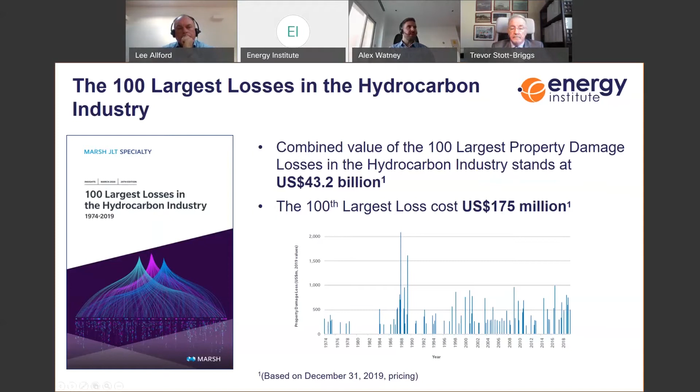So I'm sure many people will be familiar with some of the top 10 loss events. So Piper Alpha is the largest in our list, at just over $2 billion US. So this is an adjusted property damage loss for December 2019, so effectively an inflated cost. Piper Alpha, as most people probably know, was a fire and explosion event in the UK North Sea.

You've got Phillips Pasadena in Texas in 1989. That's around $1.6 billion. There's Ekofisk in the North Sea. That was 2009. That was a vessel collision with an offshore platform that caused almost $1 billion of damage. There's Baker, Gulf of Mexico, 1989, fire and explosion event. Campos Basin in Brazil, 811 million, again, fire and explosion. Esso Longford in Australia, another famous process safety case, 1998. So that's just a few of the high-level ones that people might be aware of.

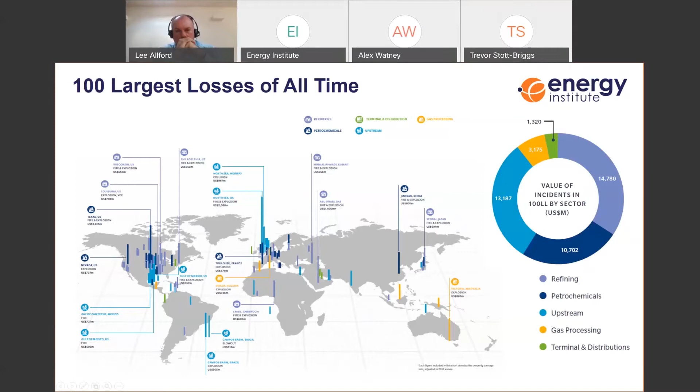And if we look at some of the more recent losses, in 2018 and 2019, you might be familiar with some of these. So just to highlight a few of the more highly cited ones. There's the PES refinery explosion in Philadelphia, which happened in June 2019. That had a recorded loss value of about $750 million. The incident was caused by the failure of a thinned elbow in an alkylation unit.

It should be noted that this site changed ownership around a dozen times over the years before the loss, and this can be seen as a red flag because each transition can introduce the potential for personnel, information records, and systems of work disruption. And this links in with asset age. It tends to be that older sites will generally have more differing owners than younger sites.

There was also the Husky refinery explosion in 2018, also in the US, in Wisconsin. It's believed that the root cause of this was an FCCU spent catalyst slide valve, which was intended to be provided with erosion protection suitable for the design life at the design conditions. But this valve had actually eroded and was unable to maintain the catalyst level required to prevent air from mixing with hydrocarbons during transient operations, and the recorded loss was $650 million.

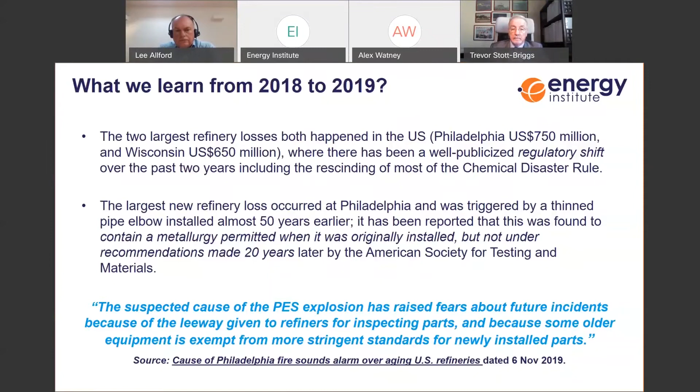If we look at what could potentially be causing these, at the end of 2017 and into 2018, US refinery utilization stood at its highest level since 2005. This high utilization continued over the past 2 years and could contribute to the number of recent high losses. Downstream margins are usually positively affected by drops in oil price, which can result in refineries being pushed to operate at greater capacities, potentially leading to process safety being impacted and increased events.

You've also got the potential impact going forward of COVID-19 and the global pandemic. While this might reduce utilization, it could also lead to cost reduction exercises, reductions in maintenance, inspection and asset integrity spends, which, when we look back at data, can cause lagging process safety and loss incidents.

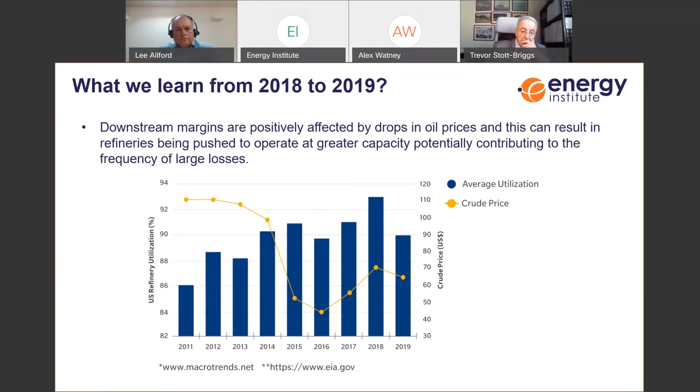Some of the data that Marsh collects relates to engineering standards. Marsh has a risk ranking system that we use to rank clients' sites in areas of installed hardware and management systems used, for example, systems of work, permit to work, management of change, emergency response. This has over 400 features that we rank within various topics and categories.

We've also seen that for both gas processing plants and terminals and distribution sites, the risk ranking data shows a potential deterioration across all areas, hardware, management systems and emergency response, over the past 12 years as well.

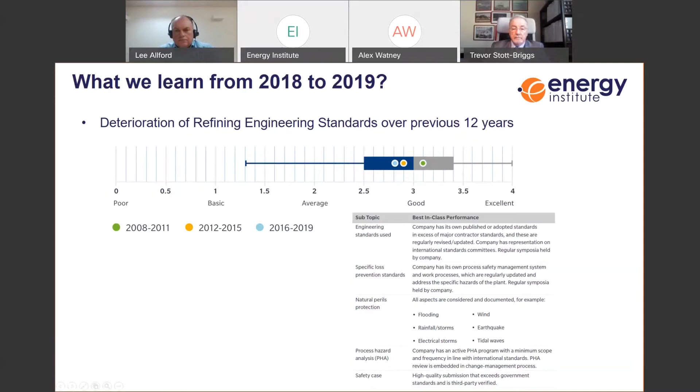I'll move now on to whether we're seeing history repeating itself. The past 2 years have contributed more incidents to the top 20 largest losses than any other 2-year window for 30 years. Not since 1988-89, when there were 6 of the largest losses, has there been such a concentration. Back in 88-89 you had Piper Alpha, Pasadena, Gulf of Mexico, the Campos Basin, Nevada, Louisiana, a large number of large value losses.

In the last 2 years we've also had a large number of losses: Jiangsu in China, the 2 refinery losses I mentioned, and Limbe in Cameroon. So you can ask, is there potentially history repeating itself?

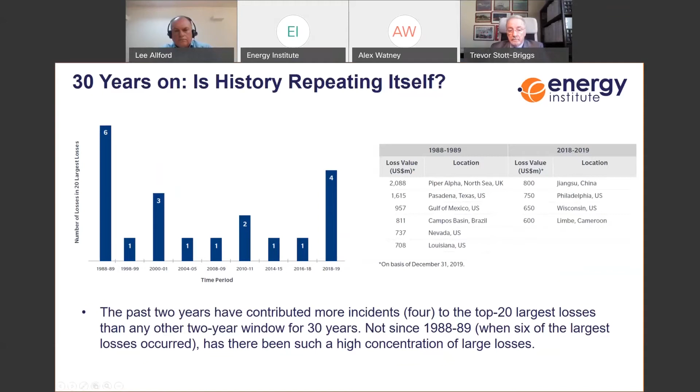Let's look at some of the contributing causes and escalating factors for both time periods, starting with 1988 to 89. For Piper Alpha there were many failings, and the Lord Cullen report made a number of recommendations that drove a lot of process safety improvements in the late 80s and 90s. Some of the failures were work permitting, management of change, especially with the change of design of the platform, shift handover, and emergency response planning and fire protection.

We also see for the Louisiana refinery that corrosion was one of the key causes of the loss. There are a lot of similar contributing causes and escalating factors. Systems of work regularly come up, and there are also escalating factors regarding emergency response.

So we generally see, good systems of work will hopefully prevent a loss of containment event, and then good emergency response and emergency control will hopefully then prevent the escalation of any loss of containment event, or if it does then start to result in a fire or explosion, it helps to reduce the amount of damage caused.

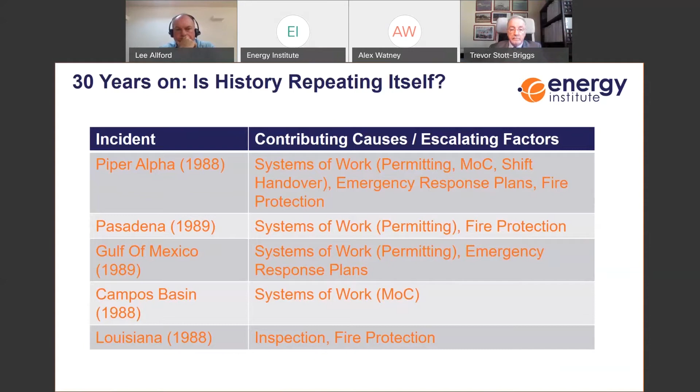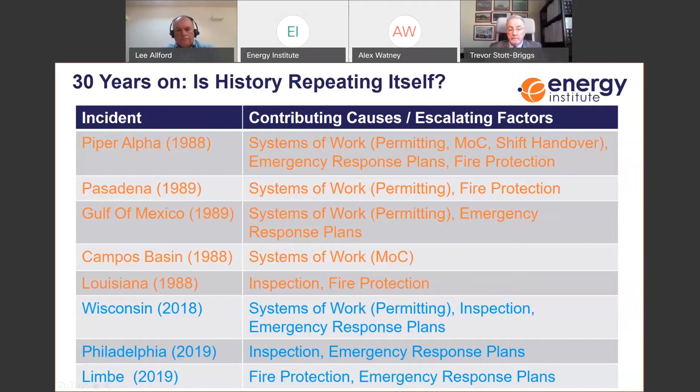And some people may be aware of a man called Trevor Kletz. He was quite a famous author on chemical engineering safety. And he's been quoted saying, "You don't have new accidents, you just have old accidents happening to new people." So how do we prevent history repeating itself?

It's a continuous process. We need to continue to educate ourselves to focus on process safety and risk management, and to learn from these lessons across all levels of our organization, from top management all the way down to frontline site personnel, and process safety culture is very important, that it's across the whole organization and it's not just in pockets. And I'm sure Lee will talk a little bit on that later on as well, when he talks about the Energy Institute Process Safety Management Framework.

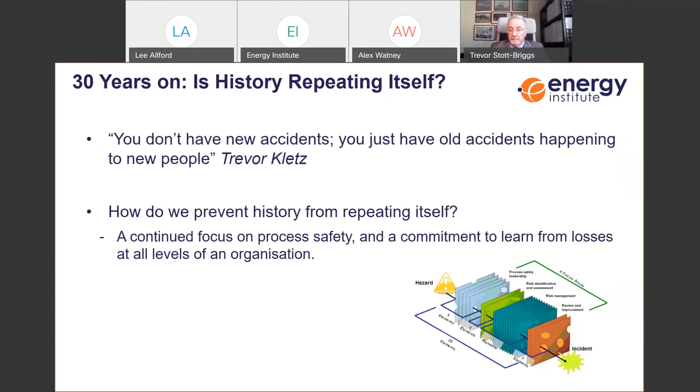If we look at some of the barriers to learning from losses, one of them is distance. So regulation often follows a major incident, and it's often enforced locally rather than globally, which can be understandable. It's quite hard to enforce regulation globally, and consequently, this only affects local awareness. And sometimes, in areas where there's maybe not a lot of regulation, and where they haven't necessarily had a lot of loss events, then they won't be learning from other past loss events. And at the same time, parties can be affected by closeness bias as well. So people will feel unconsciously less affected by events a long way away.

Next one is culture. So this can prevent lessons learned from being implemented effectively. There can be a fear of litigation or blame that prevents open reporting of incidents within organizations. And there can be difficulty challenging upwards in certain cultures and businesses, and that can prevent improvements being implemented.

Tunnel vision. So some companies don't realize the wider relevance of lessons. Siloed thinking can cause companies to imagine that an incident happening in a different type of facility from their own does not provide applicable learnings, but that's not always the case, and it's always good to try and learn from others, even if you maybe don't think that it's strictly relevant.

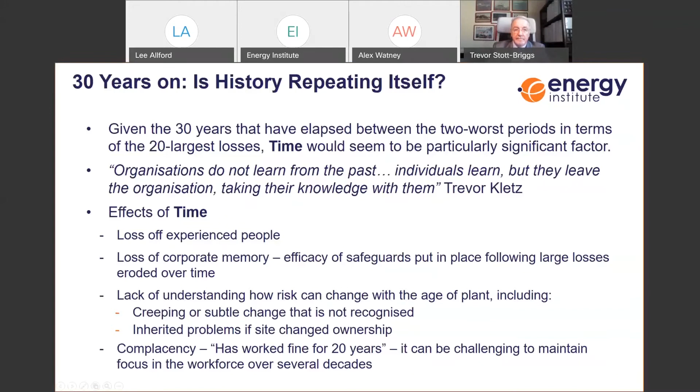So initially when plants are less than 10 years old, you have a lot of losses caused by operations related failures, and as plant operations experience develops, the number of losses reduces, and then you will have age taking its toll as facilities get older than 30 years old, and you see a steep rise in loss frequency and magnitude.

So for example, for plants that are less than 10 years old, generally a major contributing factor is operations related failures, such as non-compliance of systems of work, such as permit to work systems. Then if you look at plants aged between 10 to 30 years old, you have a much lower number of losses, and then it increases again when they're over 30 years old, and you're getting a lot more related to maintenance, inspection, particularly mechanical integrity due to the age of the facility. And what we sometimes call this is a bathtub curve.

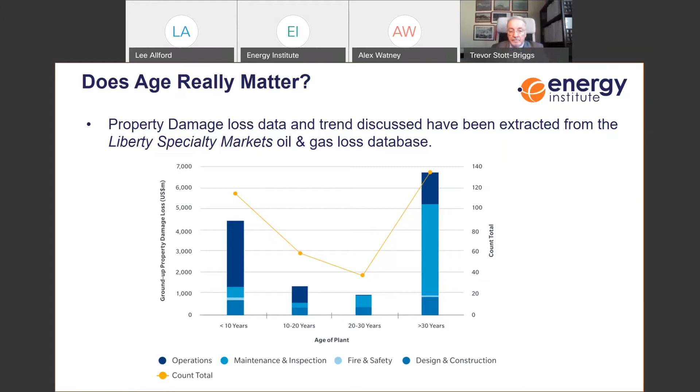So you can see both North America and Europe show a sort of bathtub curve, but it's not really seen in the same way with MENA and Asia, potentially because in the Middle East and Asia these regions are younger and there's less older facilities, and so they haven't yet reached as much of this bathtub curve. There's not as many of the facilities and data points where they start having those aging issues.

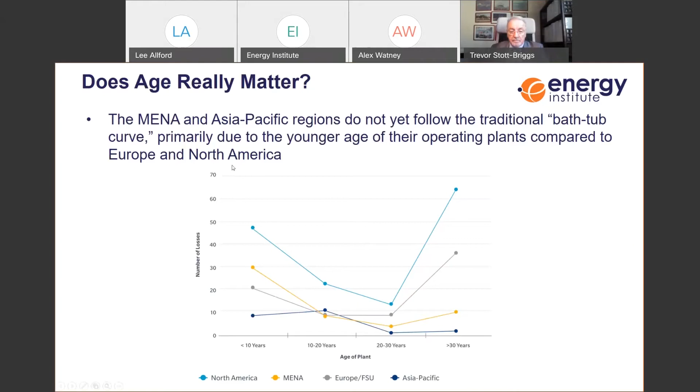And to finish off on the 100 largest losses, does age really matter? Well, this is a nice quote from Ian Robb, who's the global head of risk engineering at Liberty Specialty Markets. In order to prevent losses involving aging plant and equipment, increasing implementation of an effective mechanical integrity program is vital, and ensuring best practice metallurgy to current industry standards, inspection programs designed by qualified inspectors and corrosion engineers, along with accredited qualifications to those conducting inspections, are all essential requirements.

And this is showing a focus on mechanical integrity inspection, because there's been a large number of failures in this area that have led to significant numbers of losses. And any good process safety management framework should have mechanical integrity as a key part of that. And I regularly recommend to clients the Energy Institute's process safety management framework, because it's a great resource, including on areas such as mechanical integrity.

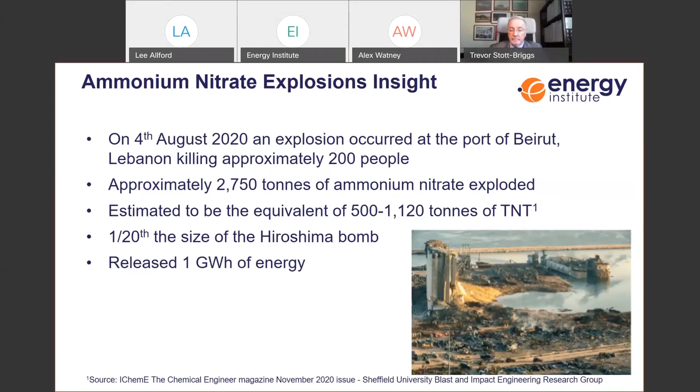And it's believed that some of the root causes were the failures relating to the appropriate storage of ammonium nitrate, which can be highly oxidizing and explosive in the wrong conditions when it's stored inappropriately. And following on from the trend of, is history repeating itself? Well, unfortunately, it seems that this is a bit of the case with ammonium nitrate storage.

The Institution of Chemical Engineers also recently reviewed 25 ammonium nitrate incidents, and 2 main concerns were highlighted. Poor safety management systems around storage and handling of ammonium nitrate was the first one. And the second one was the challenges of safe storage and handling of ammonium nitrate, particularly in the training of operatives and responders and their awareness of hazards. So there's a stark difference between hazard classification as supplied and the hazard potential in accident conditions, so the toxic release and explosion.

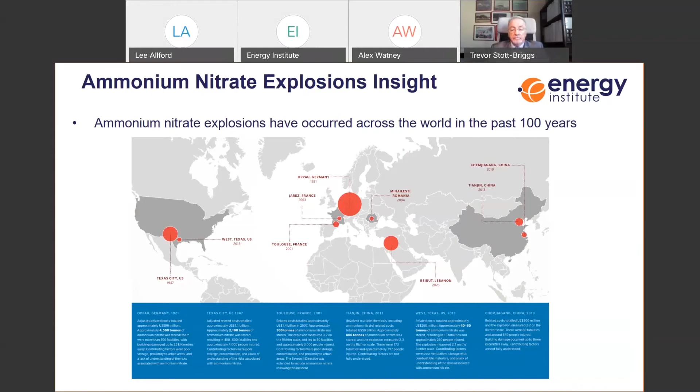And just to give you some idea of ammonium nitrate storage and handling considerations and good practice. So, you want to try and minimize the risk of contamination, exposure, shock, confinement, and heat sources. You want to make sure the storage areas and packing are constructed of non-combustible materials. You want good subdividing of the building into storage bays. You want to limit storage height depending whether they're piles or bags or drums, and segregating and distancing between packs, piles and stacks, ensuring there's good ventilation and monitoring of temperatures.

Storage buildings being equipped with smoke and heat detection, also trying to protect the ammonium nitrate from absorbing moisture, either through waterproof packaging and sheeting or air conditioning, sealing electrical fittings to prevent ingress of ammonium nitrate dust that might lead to explosions, prohibiting smoking in storage areas, and reviewing separation distances to critical infrastructure, residential buildings, and commercial buildings within the vicinity of the storage location.

There's also considerations for whether you should use fixed fire water deluge systems. So if you're storing over 2,500 tons of ammonium nitrate, then you should consider fixed water deluge systems, and there are standards such as NFPA 13 and NFPA 230 that can give guidance on that as well. You should also consider clear guidance and controls when fuel-powered vehicles such as forklift trucks are in use in the storage areas. And there's a number of publications that can provide more detailed guidance on good practice for storing and handling.

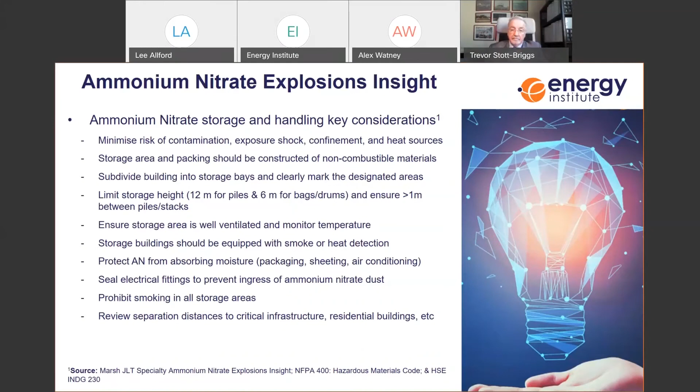So for the concluding 5 to 10 minutes of this presentation, I would like to present on the EI process safety management framework. We've all just listened to Alex expertly guiding us through the devastating consequences of getting process safety wrong, and I'd like to offer a way for how we can avoid getting process safety wrong, and even perhaps how we can get process safety more right. And this is by way of the EI high-level process safety management framework, which was published in 2010. So it's 10 years old and is widely referenced and in common use across the energy sector.

This slide illustrates the structure of the framework. And as you can see at the high end, we have 4 focus areas, as we describe them, of process safety leadership, risk identification and assessment, risk management, and review and improvement. The 4 focus areas then range across 20 elements, which are key aspects of an operation that need to be managed suitably in order to assure the integrity of the operation.

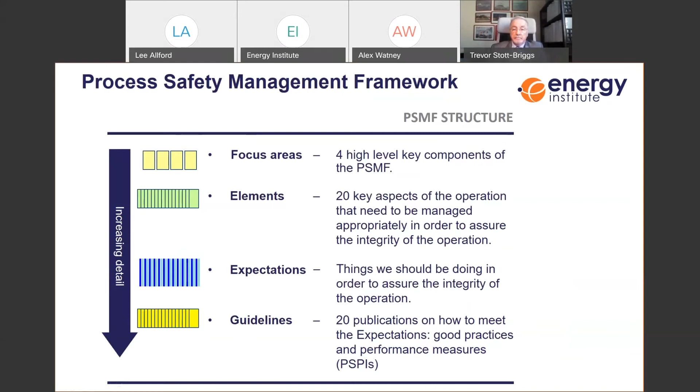To help to do this, each element contains several expectations which describe what success looks like in terms of what should be achieved to assure the integrity of the operation. And then finally, we have the guidance. Each of the elements have guidance documents which describe how to implement each of the elements.

And for the framework itself, which contains details on the focus areas, elements and expectations, these are all freely available to download from the Energy Institute publishing website. As far as the guidance documents are concerned, these are available from the publishing website, and they're free of charge to all technical partners of the EI technical program. On the latter point, the EI is working with an external organization in developing an online software application which shows a dashboard of indicators based on those described in the guidance documents.

And if anybody requires any further information or details on this, please get in touch through Trevor and the Middle East branch. Next slide, please.

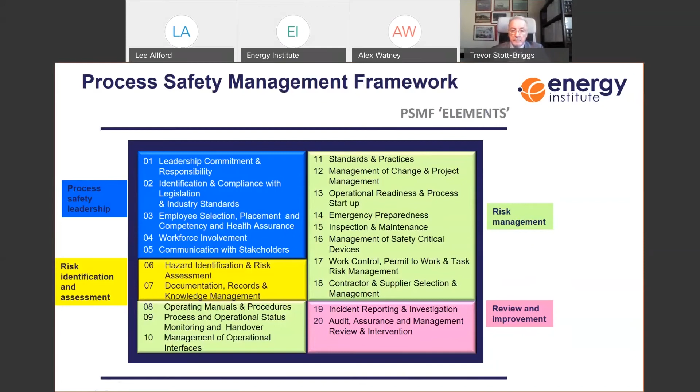So having described the structure in the previous slide, this is an illustration of how the 4 focus areas and 20 elements combine and work together. And it's rather a sort of a Battenberg cake slice view. The framework takes as its foundation the first focus area of process safety leadership, and that comprises 5 elements which, taken together as a whole, enable the right conditions and environment for doing process safety in the right way throughout a high hazards business. The second focus area of risk identification and assessment comprises 2 elements, including hazard identification and risk assessment. A particularly critical stage, because if a hazard is missed, then inevitably it will not be managed.

The third focus area, risk management, contains 11 elements, and it is deficiencies in several of these elements which led directly to many of the accidents described by Alex in his presentation, such as management of change, emergency preparedness, inspection and maintenance, and work control. Finally, we have the 4th focus area of review and improvement, which again, as Alex highlighted, we have seen flaws as history is seen to repeat itself, and there's a loss of corporate memory. Next slide.

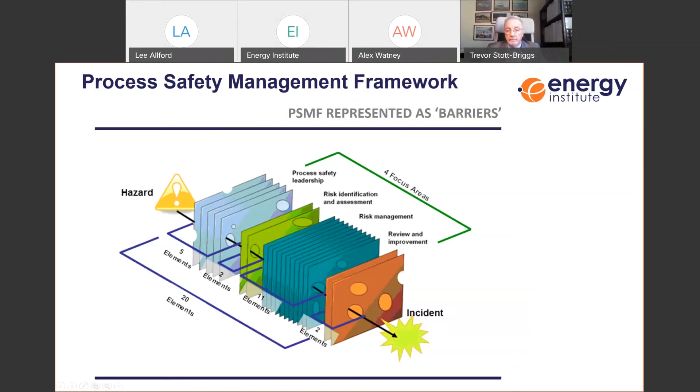Next slide. So that concludes my introduction to the process safety management framework, and I think I'd like to pass back to the moderator, Trevor, for a Q&A. Okay, thank you, Lee.

Trust you can hear me. Got it? Yeah. Great. Okay.

We have a few questions, and I have a couple of my own because this is a very interesting topic. One of the first questions that came in may have actually been answered through the presentation, because it came in after about 15 to 20 minutes in. This came from Idris Salim, and he's saying, what are the principal root causes of the 100 largest losses? Is there a single or 2 or 3 factors that always seem to occur?

Yeah, from having a look at some of the contributing causes from 1988, 89, and 2018 and 19, it's often systems of work, particularly inspection management or mechanical integrity management, and emergency response preparedness. Those are the sort of key ones, and they tend to occur regularly throughout industry.